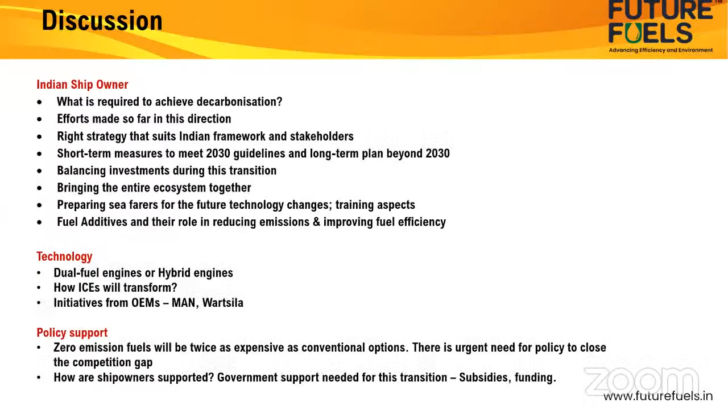The Institute of Marine Engineers, IMEI - all these associations instantly came forward to support this initiative.

Suggesting topics and speakers, I am very thankful to Captain Mahesh Yadav, who has been coordinating a lot of these speakers. Captain Bhasin and Anil Devli, CEO of INSA, also extended a lot of support.

In suggesting what we should be talking about in this webinar. And finally, Mr. Indranath Bose, when he came back from the US, within the short time available, he also connected with all the speakers.

And then collectively, we put together a lot of these topics which you see on the screen - what an Indian ship owner should be doing when at the crossroads of a lot of options and challenges, how technology will change, what kind of policy support we require from government, what is the quality of marine fuel that would be coming up, and are there any interim strategies before we reach the net zero goals, any shortcut methods that we can adopt. So a host of issues are there.

I'm not getting into the details because we have a wonderful set of panelists and two sessions which are awaiting to share their insights on this webinar.

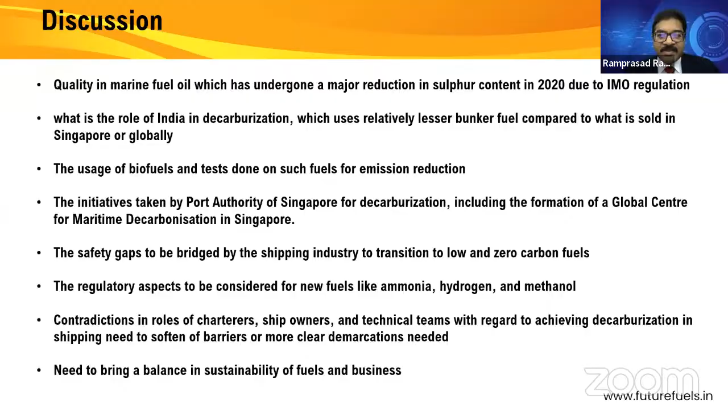Then let me quickly - so today these are the set of panelists that we have with us. I am not getting into the reading of the profiles because they are experts in their own domain and well known to the industry, and these profiles are available on our website, so you can get into the details later.

We have Mr. Indranath Bose, who is the advisor to the Great Eastern Shipping Company, with 50 years of experience in the maritime industry. Then we have Mr. Vijay Arora, who is the Managing Director of Indian Register of Shipping, IRClass.

Then we have Captain Mahendra Bhasin, who is the Chairman of BASA, and also the Managing Director of MSC Crewing Services Private Limited.

Then we have Jitendra Nimagadda, who is the CEO of Mudra Group. He heads the maritime related businesses of the group.

Then we have Sachin Kulkarni, who is a mechanical engineer from the Indian Institute of Materials Management. He is the head of marine business for South Asia from Wartsila.

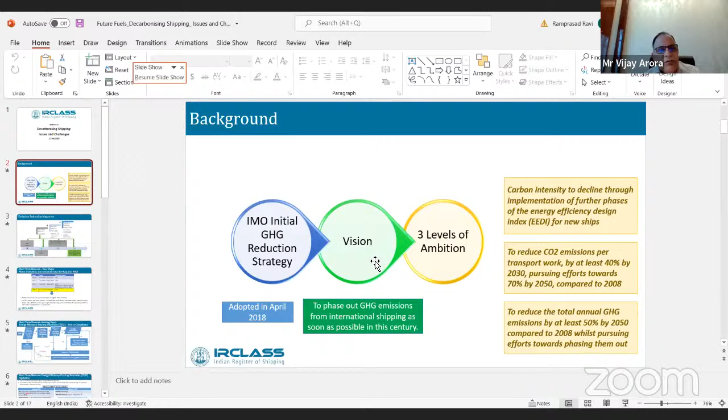Anything starts with a strategy, and if you look at IMO, it has been working on how the various emissions in the atmosphere have been controlled over a period of time. We talk about NOx emissions, Tier 1, Tier 2 requirements came, then sulfur desulfurization, and later it came out with the IMO strategy on decarbonization, saying how we can further improve GHG emissions. This IMO strategy was adopted in April 2018.

The vision was to phase out GHG emissions from international shipping as soon as possible in this century. To achieve this, a combination of factors was taken into account: carbon intensity should improve by improving the EEDI, we should reduce CO2 emissions by 40% by 2030 and 70% by 2050, and reduce GHG emissions by 2050, all compared to 2008 levels. So the framework was put in place. Can you go to the next slide?

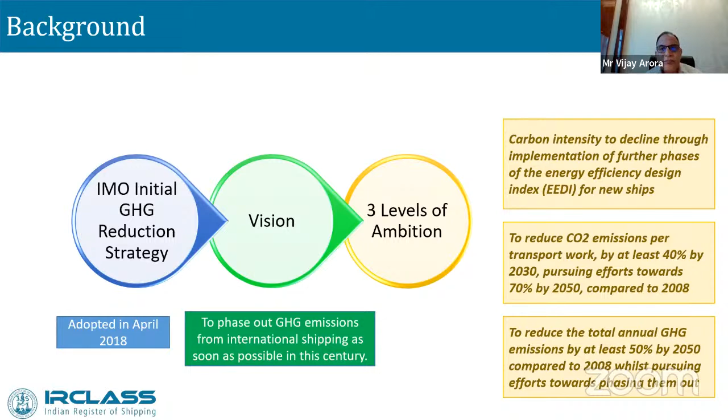So to achieve the vision, there were short-term, mid-term, and long-term measures adopted. Short-term measures were from 2018 to 2023, mid-term from 2023 to 2030, and 2030 onwards will be long-term measures. We are currently in the short-term measures.

When we look at those measures, if you recall, in 2018 we came out with SEEMP Part 2, which talked about how the fuel consumption should be collected. In 2019, we started collecting the fuel consumption. Then in 2020, we talked about how the new ships' EEDI phase can be advanced, and that is how the new ships are helping us reduce CO2 emissions.

At the same time, we are coming out in 2023 where CII and SEEMP Part 3 are coming out, where CII will be using the IMO fuel consumption data available with us, and the carbon intensity indicator will be used to see how both existing ships and new ships combined together are able to help us achieve the 40% reduction of CO2 emissions by 2030. So we go to the next slide.

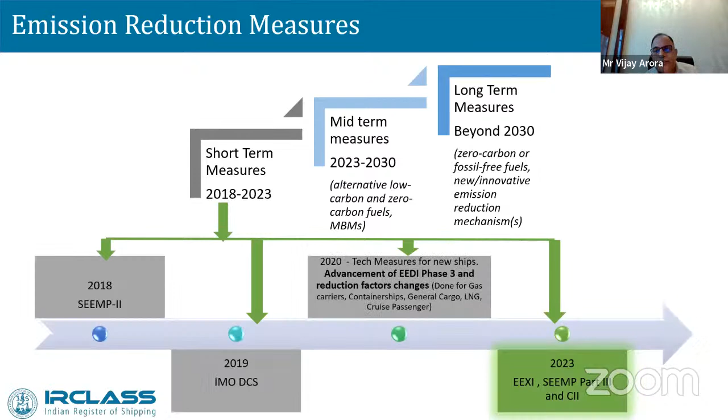This is talking about the various phases of reductions which were applicable for EEDI, mostly from the new ships. The efforts started from 2013 and are ongoing on the direction of how we can reduce CO2 emissions by designing ships in a manner that fuel consumption is reduced.

As stated in the IMO strategy in 2018, phase 3 has now been advanced so that certain ship types of larger tonnage will be requested to build ships in a manner that CO2 emissions are reduced. This advance from phase 3 will take place from April 2022, where such ships, maybe gas carriers or container ships, will be advised to have further reduction factors of 30% applicable.

Go to the next slide, sir.

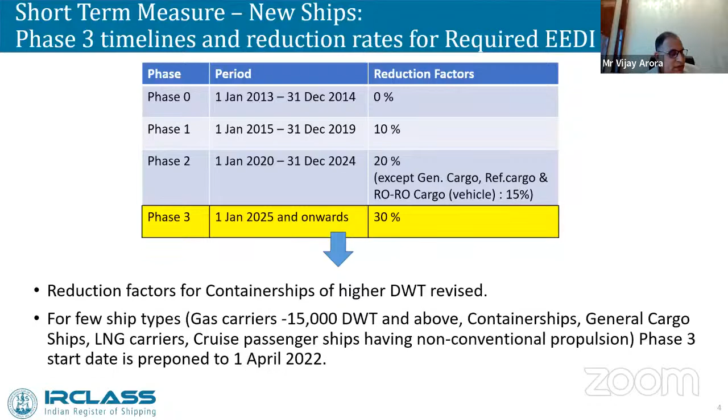As just stated, the combination of new ships and existing ships will continue for some time while we are using fossil fuels, and new ships are being designed with higher reduction factors. Even the existing ships need to catch up with the new ships. For that matter, IMO came out with a regulation stating that ships of 400 GT and above, and certain ship types mentioned in regulation 25, if their threshold value is greater than a certain deadweight, are subjected to this regulation.

That is how the attained EEXI will be calculated. The required EEXI will be calculated, and we'll compare that attained EEXI should be less than the required EEXI so that ships are issued the technical file and the International Energy Efficiency Certificate. This will be mandatory from the initial, annual, intermediate, or renewal survey falling due after 1st January 2023. But the regulation will become effective from 1st November 2022.

I would like to reinforce this issue of 1st November 2022. I think that date is a very important date. By this date, the ship owner should ensure that the technical file, if possible, is placed on board, so that if the PSC boards the vessel, you have a technical file available with you. Then the IEEC can be issued when the surveyor boards for whatever first survey falls due after 1st January 2023. We can go to the next slide.

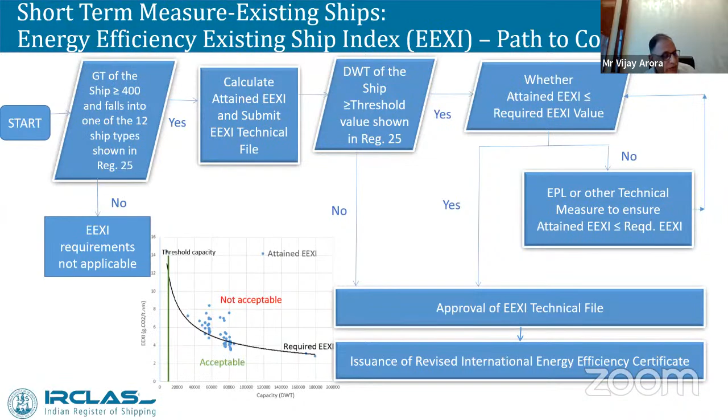Okay, sir, I may take 3-4 more minutes if you don't mind. Otherwise I'll be faster, no problem, I'll be a little faster.

That means today's existing ships have to match with the EEDI of those ships which are built with the phase 2 requirements, which is a very difficult task, but the owners have to do that. A little more difficult task is that if the ships are built before 2013 and they don't have the sea trial report, then there are some issues.

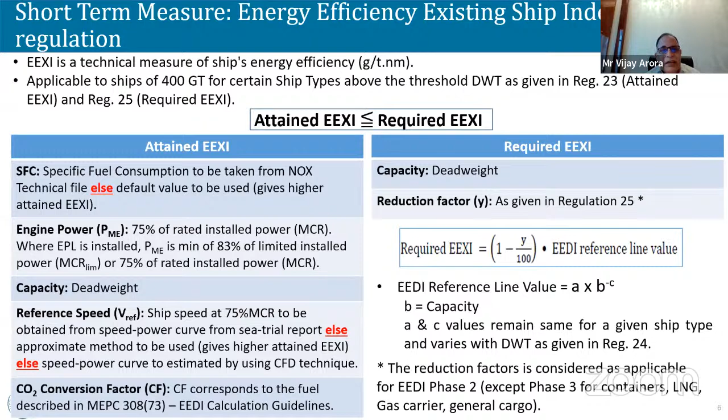But those issues can be resolved: either you can opt for the option that an approximate value can be used, or you can go for CFD analysis. The approximate value helps you, but it is not so encouraging for the ship owner because the attained EEXI goes on the higher side, by which the ship owner is affected. But if CFD techniques can be used to really determine the V reference, which is not available, then the ship owner is at peace. At least he is not affected.

We go to the next slide.

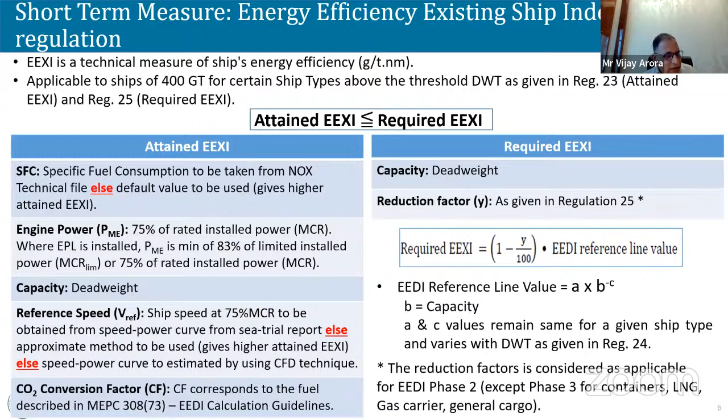Here again, I'd like to say a few things which are important. Let us be very clear that if we are able to meet EEXI today, it is good, but you have to meet CII also for all the time you are going to operate these ships. So it is always better to improve your attained EEXI to a larger extent so that the design itself takes care of your operational efficiency, because the ships are old; they cannot operate more efficiently than they are operating today.

You can control to some extent, but if you can have such energy saving devices fitted on your ships, you will be able to run these ships for a longer period, because this design efficiency will give you a factor in the CII part. We can go to the next slide.

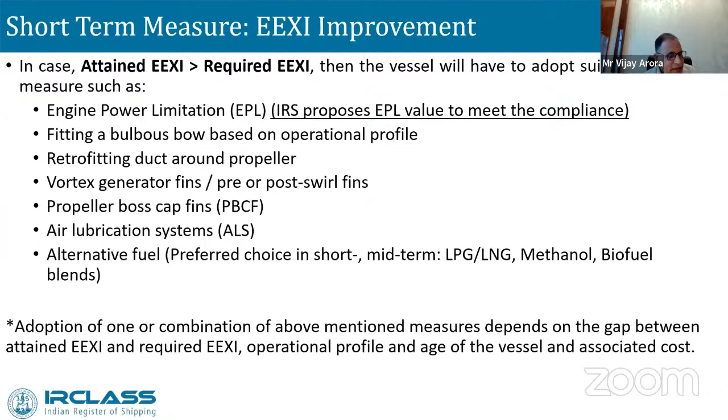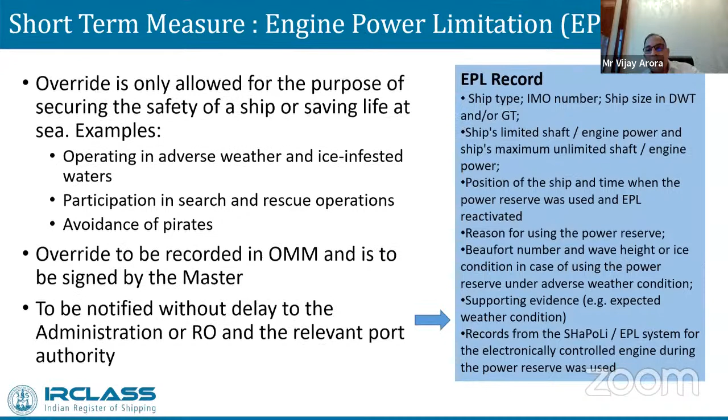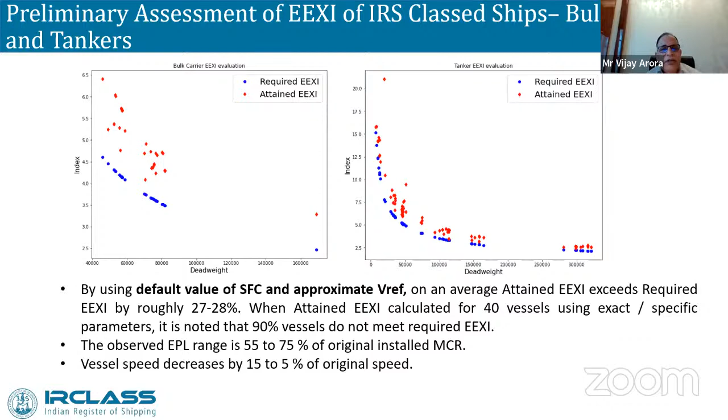So most of the vessels today, almost 90% of the vessels which are with us, have a problem that they will not be able to meet it unless they adopt some measures. And the measures required may range from 55 to 75%, which may lead to a reduction of speed from 15 to 5%. So we can go to the next slide.

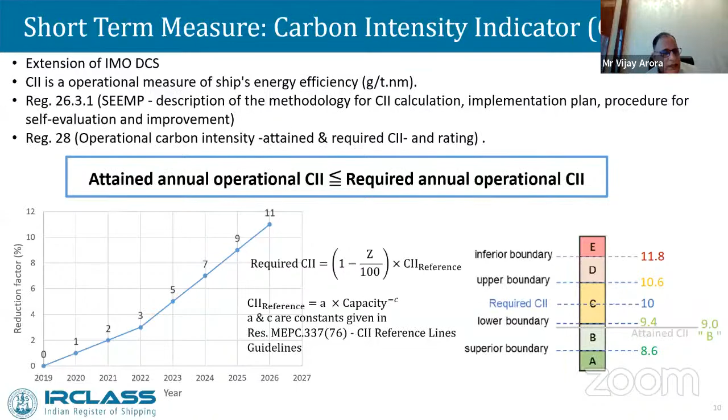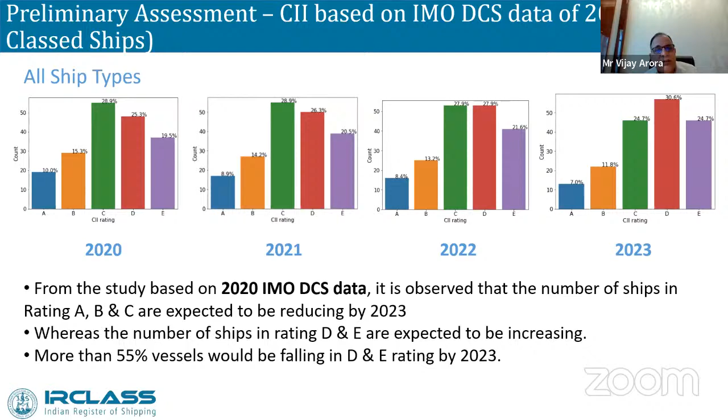So what is happening if nothing is being done? These ships which are in A, B, and C start going to D and E, which the IMO discourages, since they don't want a ship to have a continuous rating in D category for more than 2 times or in E category. And that becomes an issue which needs to be addressed by using the energy saving devices. We can go to the next slide, sir.

Again, the alternate fuels part I have not discussed in detail, but I'll say that the industry is working on this, but it requires a good approach by a range of industry people, governments, lending institutions, engine manufacturers, yards. They need to come together to look into the advantages and disadvantages of the various fuels which can be used, because it is not very clear. Though we know the properties, the infrastructure needs to develop, the storage capacities need to build up. So all these things will lead to the understanding as to which fuel will be useful to us.

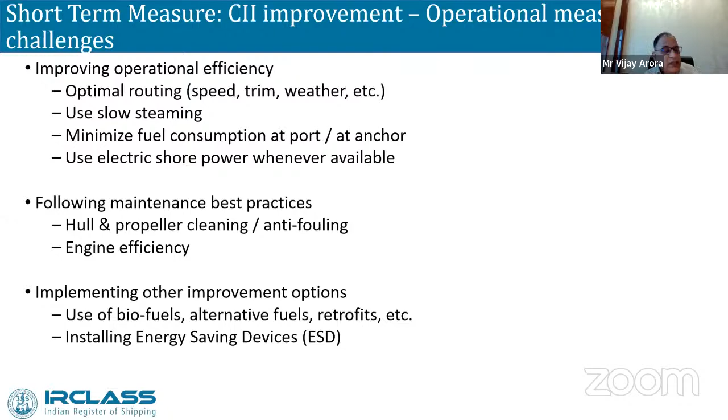While we know that the fuel which is seen to be viable is LNG, we have been using this fuel for a good amount of time. We are familiar with it, and we see that LNG can be a fuel which can be used for the next 5 years if we want to see how best our CO2 emissions reduction or decarbonization can take place. So we can put the next slides.

As far as IRS is concerned, sir, we have made rules for these types of ships. Gas fuelled vessels, LNG, LPG are available with us. We have made natural gas fuel rules for coastal vessels and inland vessels also. We have made guidelines on methanol fuelled vessels, fuel cell power installations, high voltage shore connection systems for ships, and battery powered vessels. Why these guidelines? We have put them into guidelines and not into rules so that, as more and more experience is gained, we'll see how best to incorporate them in rules. We can go to the next slide, sir.

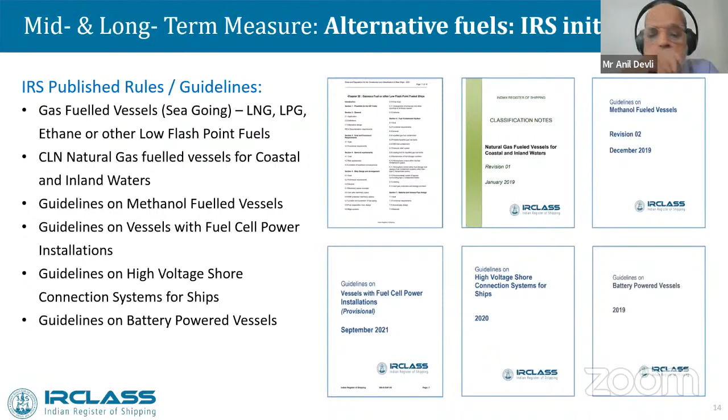So this talks about what we have done till now, again with the use of the industry. We are thankful to the industry to help us do something on this action. We have been able to run 2 cement carriers using the B20 biofuel, wherein we attained a reduction of CO2 by almost 7%, and there was no impact on NOx or SOx. That is also a good point.

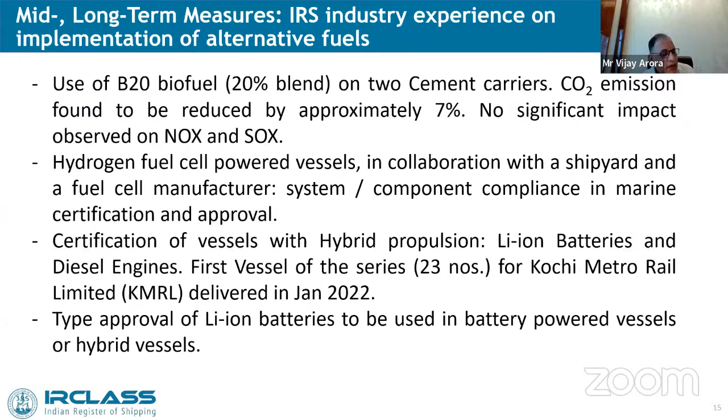We are working with the yard and the fuel cell manufacturer to have hydrogen fuel cell vessels ready maybe by this year, and we should be able to have such a ship operating. And we have also operated one first vessel, which is on this Cochin KMRL, which is Kochi Metro Rail Limited, where hybrid propulsion has been used, and we have successfully utilized the lithium-ion battery for operation of such a vessel. And we are working on the approval of these lithium-ion batteries once they are going to be manufactured in our country.

So the last slide talks about what IRS can do for the industry. We have prepared a web-based electronic tool which can help us to do the EEXI calculation. It is simple. You feed the data, it is available. And if the attained EEXI is less than the required EEXI, the technical file is prepared and can be submitted straight away to IRS for approval. And we can undertake these EEXI assessments, issue you the IEE certificate. We can help you with what energy saving devices can be fitted by using our CFD analysis. We have also prepared the CII tool, which can be used for measurement of CII ratings.

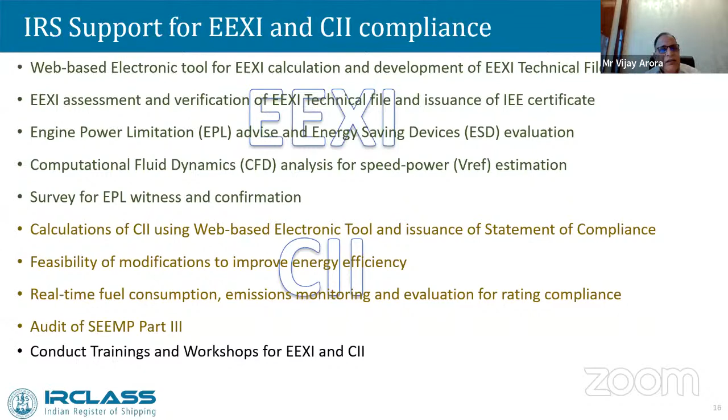And at last, we can conduct various trainings and workshops like this to see how best we can help the industry. We are geared up to see how best in the initial phase of short-term measures we can help the industry. And we are always open to any desire the industry may have and obtain from us, sir.

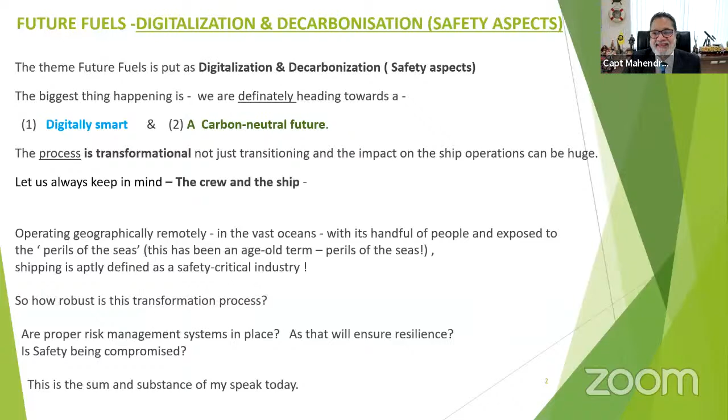Now, what is digitalization doing? It is catalyzing a wider use of data, data-driven models. I repeat, data-driven models and remote services in shipping, leading to improvements in efficiency and productivity. You will also notice I have put the heading, instead of future fuels or decarbonization, I've said digitalization and decarbonization, because they go hand in hand.

At the same time, the industry is also trying to find pathways towards decarbonization. In many cases, it is digitalization that is enabling innovation in decarbonization as well. Innovative technology is central, sure, but insufficient in isolation. Why did I say that? The success of these transformations depends on people who are the sharp end of business, the seafarers who perform and who deliver.

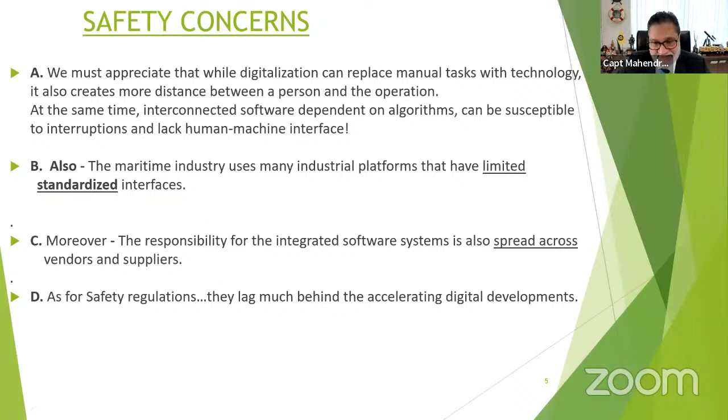Solutions. What should be done? Verification methods of future systems should be based on a systemic perspective on safety that consists of people, organization, and technology that are all related to each other and their environment. As a matter of fact, close collaboration throughout the entire life cycle will greatly facilitate system integration. Safety assessment should generate evidence for safety.

Simulation, I have put it in bold, can play a major role. Simulation can help to test and verify safety levels of the system without creating a risk to life. Another way to conduct this verification is by using digital twins that include dynamic updates on conditions and operational parameters.

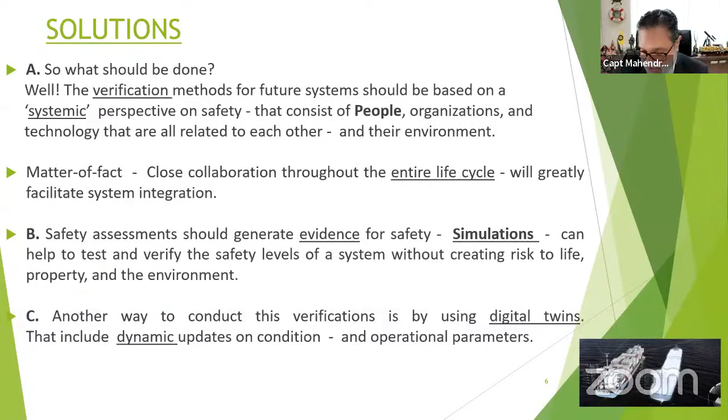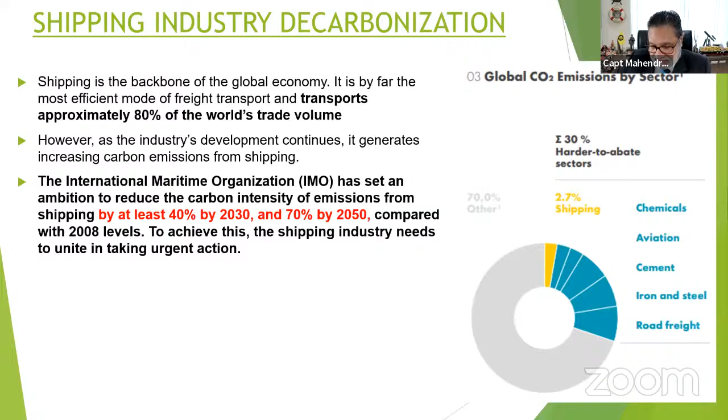Now I'm coming back to the subject. I was very glad Mr. Bose and Mr. Arora spoke about most of the things, so I'm not going to dwell much on the other one or two slides. Only thing, keep in mind that, at least, 40% by 2030 and 70% by 2050, the IMO has set this ambitious target. To achieve this, the shipping industry needs to unite in taking urgent action. I'm going to skip this slide, already shown by Mr. Arora, sir.

Sir, there is growing pressure to reduce carbon emissions. The industry also started forming coalitions, launching pilot projects. But where are we going? What have we achieved? Do we have enough data?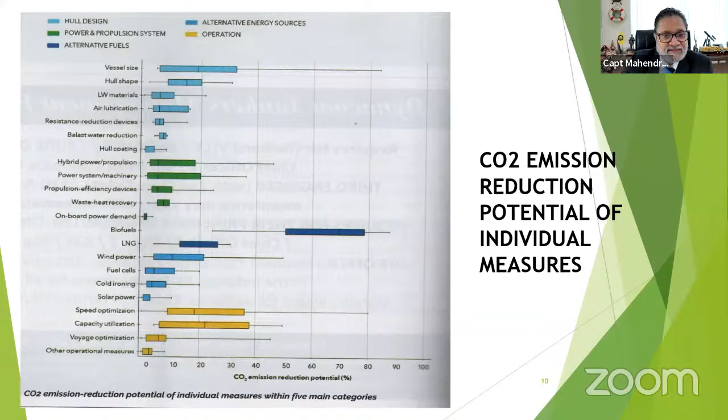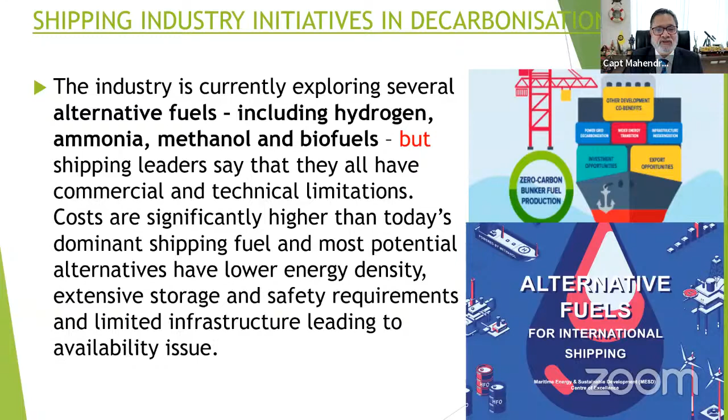While the industry is exploring several alternative fuels, okay, there are 2 minutes more, alternative fuels including hydrogen and ammonia, shipping leaders say they have commercial and technical limitations. Mr. Arora spoke about EEXI, a very important date, sir, 1st November 2022. Owners, administrations, and industry need to be ready for that.

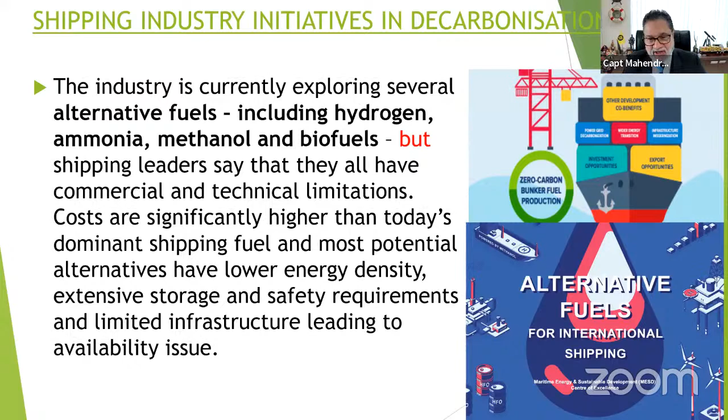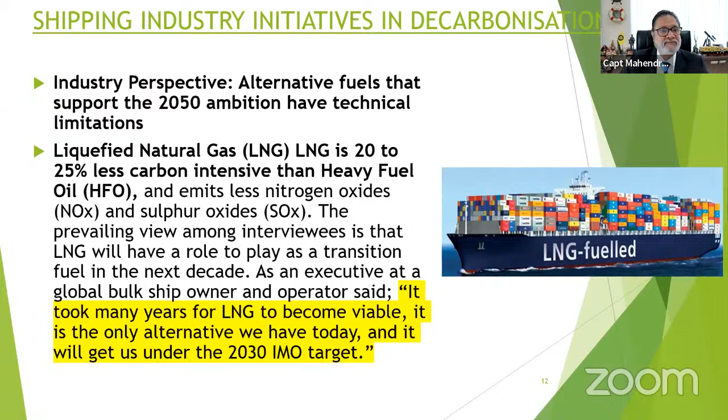Something on the current situation. LNG. LNG is 20 or 25% less carbon intensive. I will read the area highlighted in yellow. It took many years for LNG to become viable. It is the only alternative we have today, and it will get us under the 2030 IMO target. What happens after that? That's what we are all discussing. Other alternative fuels, hydrogen and ammonia, biofuels, methanol: ongoing research and development will tell us about the future fuels.

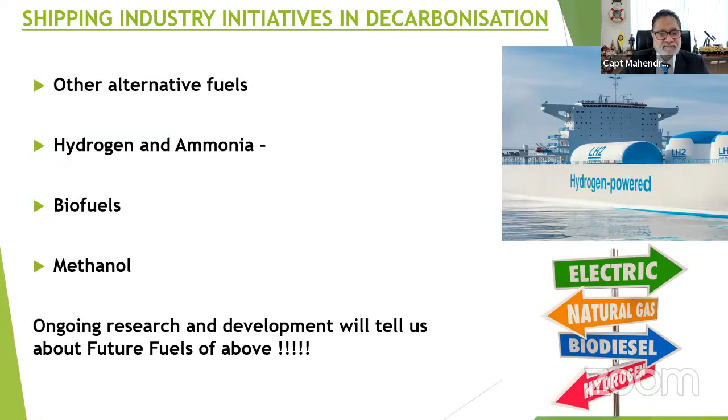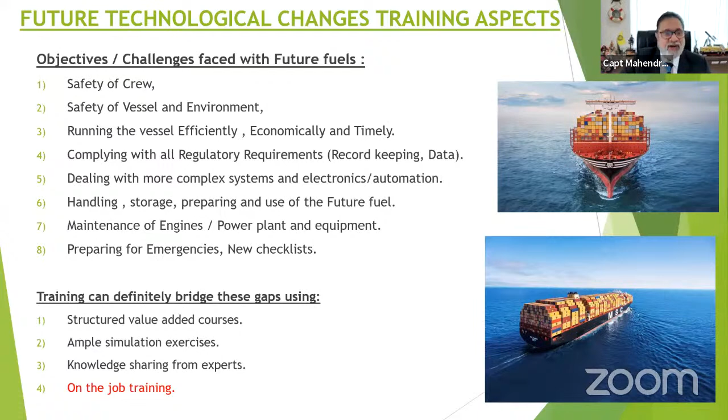You are all aware for LNG, there is a requirement for the people going on board must have 1 month sailing and 1 bunker operation. So these are good things, on the job training. In conclusion, sir, digital transformation calls for system integration and the new ways of managing risk associated with complex systems. Transformation to carbon neutral shipping requires stakeholders collaborate to increase transparency and create a culture of continuous learning.

Most important, both these advancements should be complemented with efforts to keep people in loop, so that the innovative technology that is designed, maintained, and operated by optimally performing people in organizations that embrace holistic risk management is what will put the industry in the best position to transform itself through the digitalization and decarbonization.

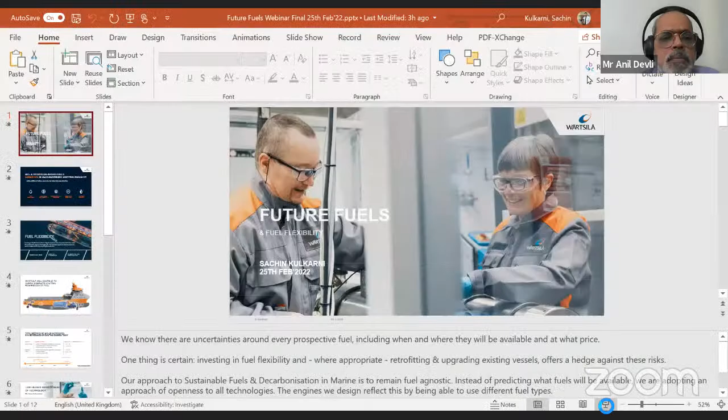A lot of wise and advisory words have already come. What I'll try to do is next 5 to 7 minutes, just touch base on the future fuel parts and the fuel flexibility part of it, and how Wärtsilä can support the ship owners and the shipping industry in large.

So we have seen that IMO targets for 2030, and then it's very clear that compliance can be achieved in the short term by optimizing the vessel operations and basically introducing the slow speed, which we call engine power limitation. However, when we look at the IMO 2050 greenhouse gas targets and beyond, then we need to consider the introduction and the transition to the green fuel. Now, the challenge here is that there are many different options, and at this point of time, no consensus on which future fuel will be commercially available.

So commercial availability depends on various factors, that is geographical location, the national interest of the particular country, legislation, and the availability of the feedstock. Now, these uncertainties create a business risk regarding the fuel availability. So there are certain factors which ship owners must be considering while taking the decision forward. The increased capex and opex associated with this, the vessel design, structure, storage, and the handling, including the complex setting in managing the cryogenic condition of the fuels and the toxicity.

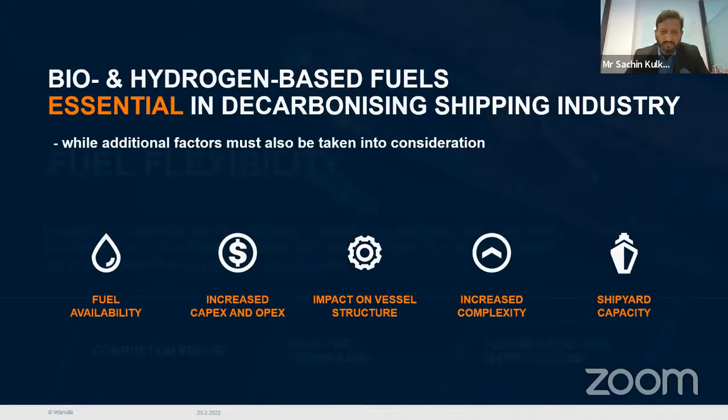Then we also have the timing issue. When should one make the investment and go for another fuel? We have limited amount of shipyards, and at any point of time, it will be not feasible to upgrade all these vessels or build new vessels at the same time. So these are the factors one has to consider before taking the decision. So then what is the solution forward?

We believe that investing in flexible fuel solution mitigates the business risk associated with the future fuel. The combustion engine is fuel agnostic. The business impact of future conversion can be reduced further by preparing the fuel tanks. So what we are talking about here is that with the combustion engine, it's important to understand that the engine doesn't really care whether we feed it LNG or ammonia.

It's also important to remember when building a new ship, the fuel supply system is to be factored. This is perhaps the toughest thing to change during the retrofit project. And while building a new vessel, one needs to think about the storage part of it. These kind of tanks installed today need to be suitable to the transition and to use the green fuel in the future.

So in Wärtsilä, we shall continue to support and supply the complete system regardless of the fuel. We are ideally positioned at this point of time to provide the complete integration solution, the complete fuel propulsion package from the tanks, the fuel supply system, the engines and propulsion.

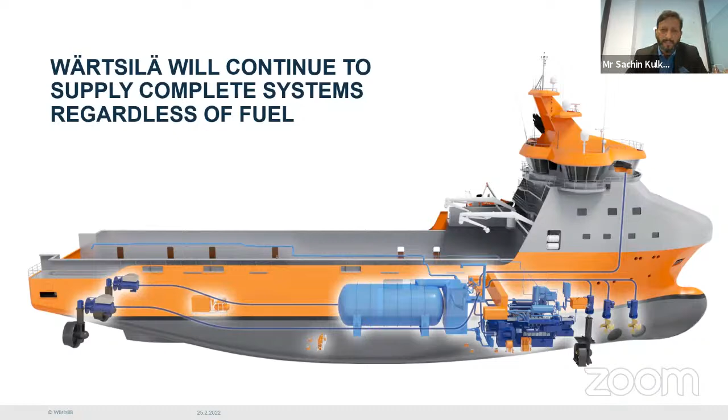So if a ship owner has a diesel engine today, what can be done at this point of time before we have green fuels available? When we look at the diesel engine, there is a potential for upgrade. We can look at improvement in efficiency via different upgrades. We can also look at conversion of the engine to DF or LNG engine, and it can derive a certain amount of reduction potential, as we can see over there.

Then if we have a multi-fuel engine, it's already an advantage position. We look at improvement in efficiency via different upgrades again, and we also can look at reduced methane slip. So when we look at the milestone till 2030, there are various ways.

If we look at EEXI plus optimization of vessel operation plus LNG as a fuel, this could be the recommendation. And then moving forward to 2040, once green fuels are available, we can look at carbon neutral fuels.

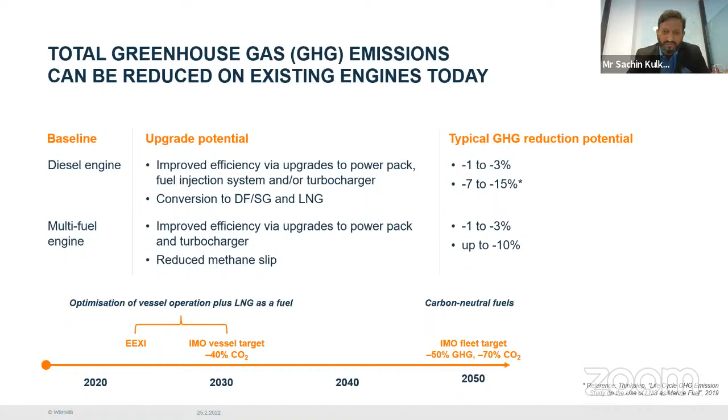So the continuous development of technology in Wärtsilä, our future fuel roadmap is very clear. When we look at biosynthetic methane, it contains 99% methane, and it can readily be used in liquid form with equivalent equipment made for LNG.

Then we have methanol. Its conversion package is available already for one of our engines, Series Z40, and I'm pleased to share that we already have another engine, Wärtsilä 32, now compliant with methanol usage. We have the technology, and now we are looking at industrializing this technology on different portfolios of Wärtsilä engines as per market needs.

When you look at ammonia, again we have a technology capable of using ammonia. At this point of time, we need a combustion concept to maximize engine performance, and safety aspects are currently being investigated. For hydrogen, our gas engines are already able to blend hydrogen with LNG up to 25%, and we are currently working on defining the technology for pure hydrogen, focusing on maximizing engine performance.

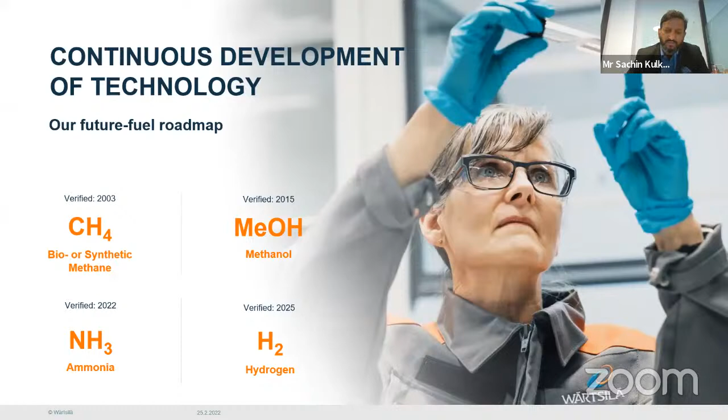So while this is happening, all research and development is in process. How do ship owners look at the situation currently? The transition fuel is something necessary to cope up, since we don't have green fuel available yet. So customers, ship owners, need to act now if they want to reduce the greenhouse gas emissions of their vessel fleet.

Conversion to LNG is one of the best options available because the multi-fuel engine opens up more options to reduce GHG emissions further in future, by allowing a transition to biosynthetic methane, green ammonia, or methanol when they are available.

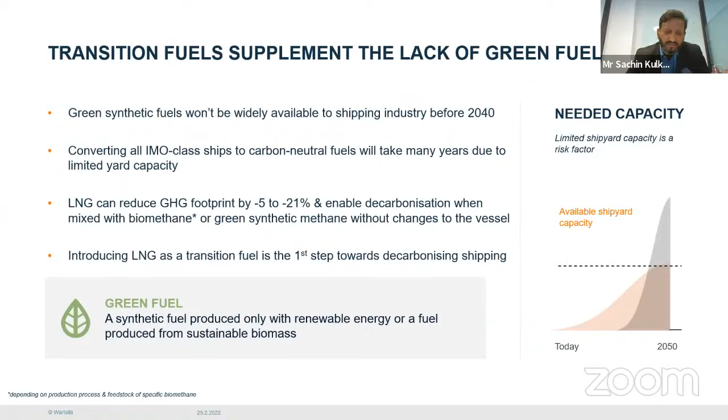When we look at different fuels, due to the low volumetric density of the different fuels, the vessel endurance could be different. That needs to be considered. The tank size and location is another important operational aspect to be considered.

Blending versus pure — what are the output requirements? What are the efficiency requirements, emissions, and along with these green fuels, what exhaust gas abatement is to be done?

What systems need to be changed when introducing a new fuel? From our side, we can look at the fuel gas supply system — that's a very important part of the system. There we need to look at materials, and we need to look at the different pressures, insulation, and toxicities associated.

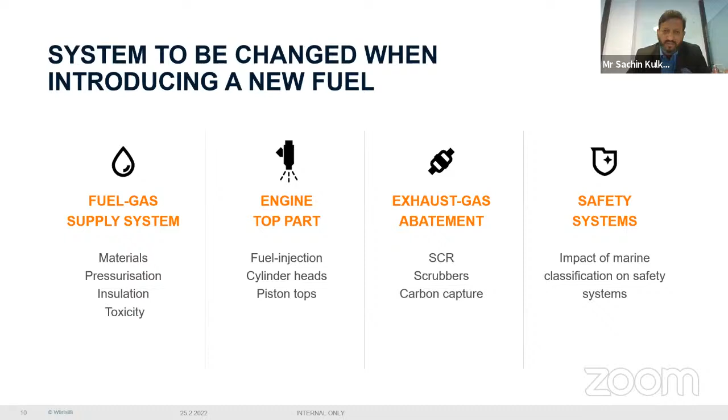A small modification — we talk about the engine top part: fuel injection system, cylinder heads and piston tops, exhaust gas abatement like SCR, scrubbers and carbon capture, depending on the particular fuel being looked at. And of course, importantly, safety systems and the impact of marine classification on safety systems. So these are the few changes associated with introducing a new fuel.

So as a summary, what are the key takeaways? There is no single future fuel — there will be a whole variety in use. Investing in fuel flexibility will mitigate compliance and business risk. Wärtsilä will continue to supply a complete system regardless of fuel, and the multi-fuel engine offers a viable upgrade path to future fuels. With this, I would like to conclude my opening remarks.

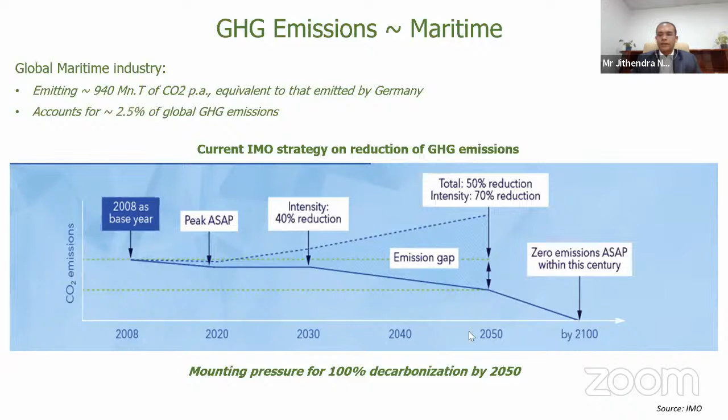We are also seeing a lot of initiatives being taken by the industry. So what are the kind of future fuels currently on the radar in terms of meeting these decarbonization targets? We are talking about LNG as an immediate intermediate fuel for reducing CO2 emissions, and there have been a lot of vessels already plying commercially with bunkering happening. We are talking about other fuels like methanol, hydrogen, ammonia coming into the picture. Biofuel is also one of the other future fuel options.

So whether anything has been finalized, whether something has been taken up by the industry as a standard, well, it depends on several factors: the kind of technology on board and onshore, the energy density that each of these fuels delivers, the safety requirements of the vessel, the onshore, and the crew, the scalability of the technology and the availability of the fuel across the globe, the ease of transportation from place to place, and of course, the financial viability.

These are the major factors which will determine which of these fuels, or a combination of fuels, will become the options for the future fuels. However, the jury is still out. This is still some time away, at least in my mind about 5 to 10 years, before a fuel or combination of fuels gets finalized and the industry moves towards standardization.

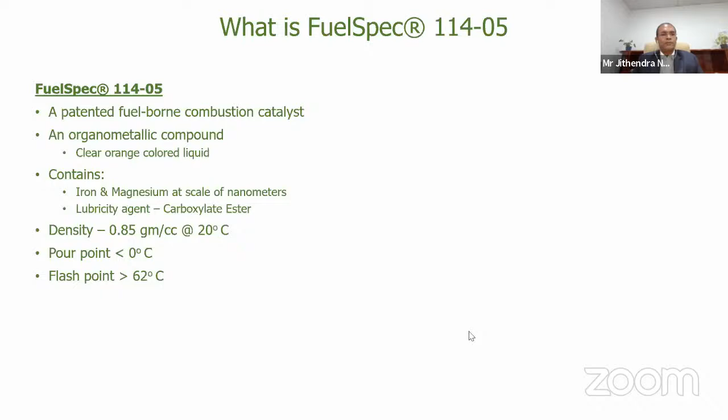So what does it contain? It contains basically iron and magnesium at a scale of nanometers, less than 10 nanometers. And the medium, that is the lubricity agent, is a carboxylate ester. A few more points in terms of its pour point, flash point, and density of the product.

So what is its functionality, or what does it do to help in reducing these kinds of emissions? It basically improves the thermodynamic efficiency of the combustion of hydrocarbons through a catalytic process. It's a patented and proprietary technology based on electromagnetic emission spectra complementarity.

So what does it do? It actually leads to complete combustion of fuel. Normally in any kind of combustion engine, you'll always have a certain amount of hydrocarbons coming out as unburnt hydrocarbons, so the combustion is not 100%. That leads to excess emissions, whether it's soot or particulate matter, UHCs, NOx, CO, etc.

Because of this complete combustion by the FuelSpec, there is a reduction in NOx, what we've observed from empirical results as well as field trials, by up to 10 to 30%. Similarly, emission reduction in CO by up to 40%, and particulate matter reduction up to 90%. There is also a reduction in UHCs, and it leads to lower carbon deposits in the equipment.

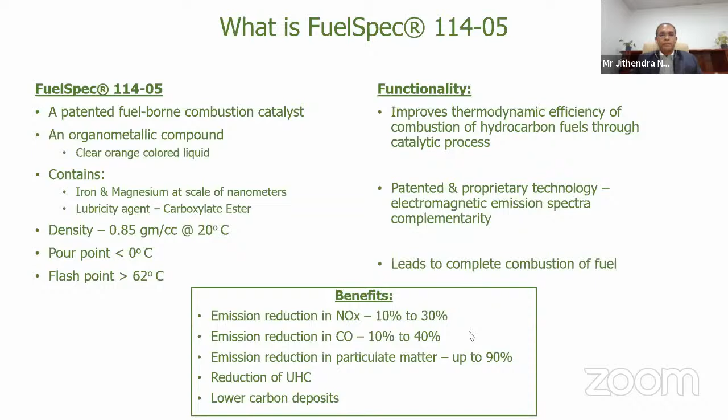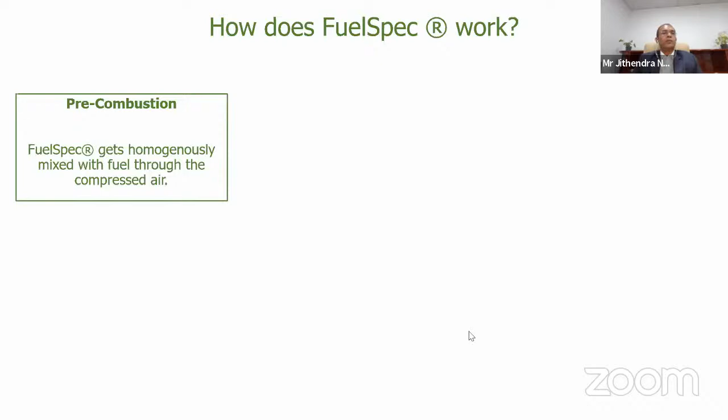So how does FuelSpec work? Fuel spec actually has very high miscibility, that is, it gets very easily mixed with the fuel. In the pre-combustion process, the FuelSpec gets completely and homogeneously mixed with the fuel through the compressed air.

During the first phase of combustion, that is the actual combustion which happens for the hydrocarbons in the engine, normally the fuel gets burnt and a certain amount of energy gets wasted because the entire energy doesn't get transformed into 100% combustion. That is where the iron and magnesium components of FuelSpec actually store the energy, that is the peak heat, during the first phase of combustion, and release that heat in the second phase of combustion.

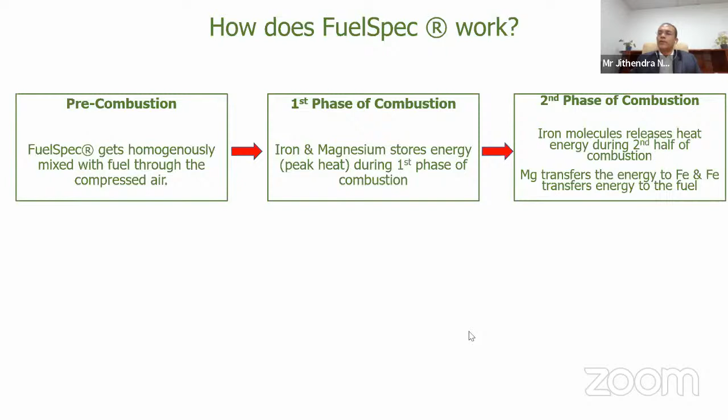So magnesium, as I mentioned about the electromagnetic complementarity, captures the energy, and iron also captures the energy. Iron initially releases that energy to the hydrocarbons, and the higher spectrum magnesium transfers that energy to iron, and then subsequently iron transfers it back into the fuel. This is what leads to complete combustion of the fuel.

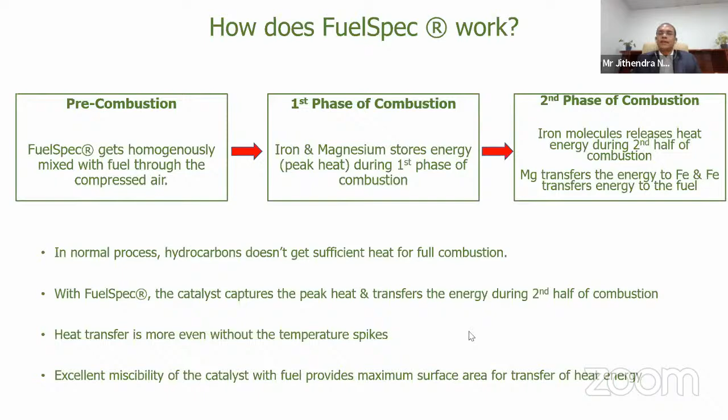That is the reason why, in a normal process, the hydrocarbons don't get sufficient heat for full combustion. With this catalyst, it captures that peak heat and simply transfers it to the fuel during the second half of combustion. Hence there are no temperature spikes and the heat transfer is more evenly distributed. And because of its excellent miscibility, the FuelSpec gets completely mixed and has a greater surface area for transfer of energy into the hydrocarbons.

So how is it used? Do we require any additional equipment or infrastructure, either on board the vessels or on shore? Absolutely nothing. It's just a very simple mixing ratio of 1:4,000. So for every 4,000 liters of fuel, 1 liter of this FuelSpec has to be added. You can see the pictorial representation of how simple it is, just a direct mixture based on this 1:4,000 ratio.

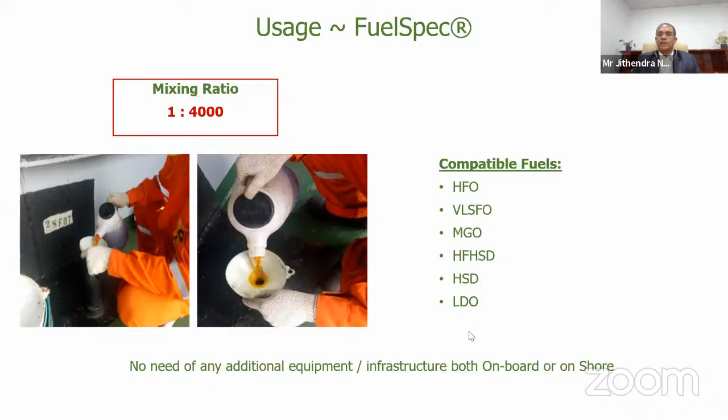So all types of fuel that go into vessels, heavy mining equipment, logistics industries, or fuel-fired boilers can be compatible fuels for usage of FuelSpec, whether you're talking about HFO, VLSFO, MGO, HFHSD, HSD, or LDO.

Of course, one of the first questions which comes to most of your minds, I'm sure, is: is it safe? What happens if we mix this particular catalyst into the fuel? Does it damage the engine? Does it create any kind of other side effects?

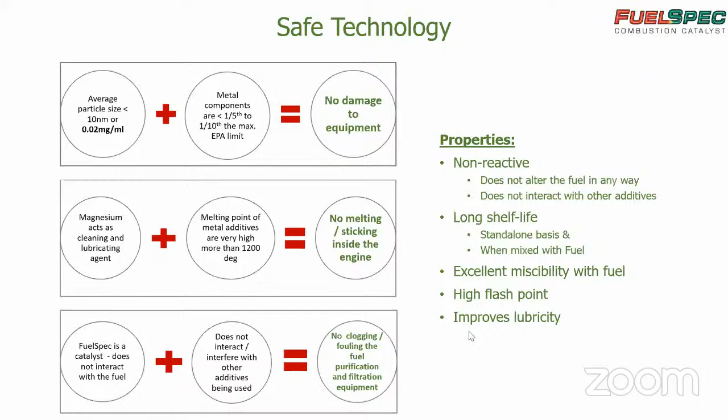Absolutely none. First and foremost, the average particle size of this ferrous and magnesium is less than 10 nanometers. In fact, it varies between 5 and 10 nanometers. So the metal components are less than 1/5 to 1/10 of the maximum EPA limit prescribed by the US Environmental Protection Agency. Hence, there is absolutely no damage to either the equipment or the environment.

Second, the magnesium in this fuel catalyst acts as a cleaning and lubricating agent. And the melting point of both these metal additives, ferrous and magnesium, is very high, more than 1200 degrees, so there is absolutely no question of melting or sticking inside the engine. And the FuelSpec is just a catalyst. It doesn't interact with, alter or modify the properties of either the fuel or any other additives being used complementarily in the engines.

Hence, there is absolutely no question of clogging or fouling the fuel purification systems, the piping systems, or any other pumping systems. As I mentioned, the FuelSpec is non-reactive, neither with the fuel nor with any other additives. It has a very long shelf life without any degradation of its quality, either on a standalone basis or when mixed with the fuel.

It has excellent miscibility, so mixing this FuelSpec with the various types of fuel we mentioned is extremely easy and doesn't require any additional knowledge, technical equipment or infrastructure. It has a very high flash point, so it is very easy to transport, and it also improves lubricity.

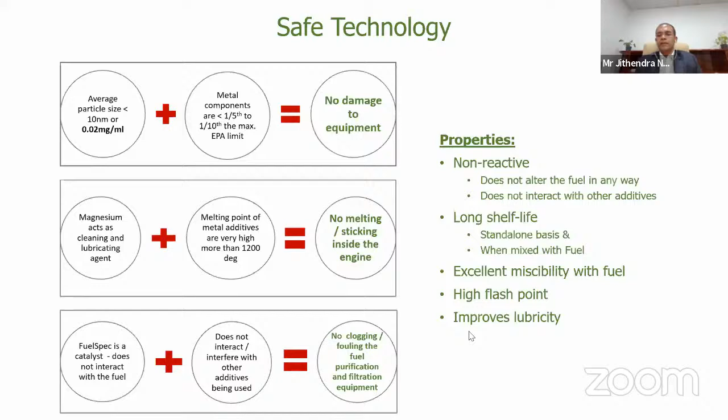What are the kind of approvals that this particular... If you can, I request you to kindly hasten, please. Thank you. Sure, in the next couple of minutes.

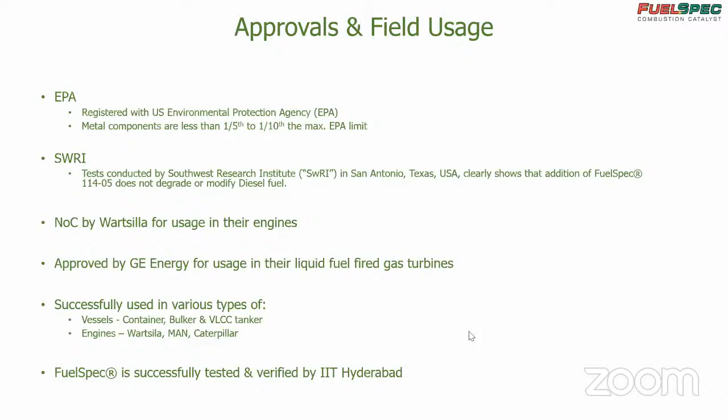So it has the approval of the US Environmental Protection Agency, and as I mentioned, it is less than 1/5 or 1/10 of the maximum EPA limit. The Southwest Research Institute of the US has tested this product mixed with fuel, and it shows that this catalyst doesn't degrade or even modify the fuel characteristics. The NOC has already been obtained by Wärtsilä for usage in their engines. I would also like to thank Mr. Sachin and the entire Wärtsilä team for that.

It is also approved by GE Energy for usage in their liquid fuel-fired gas turbines. And it has been successfully used in various types of vessels: bulkers, bulk containers, general cargo vessels, VLCC tankers, in both Wärtsilä and Caterpillar engines. And the FuelSpec has been successfully tested, and its properties and results have been verified by IIT Hyderabad.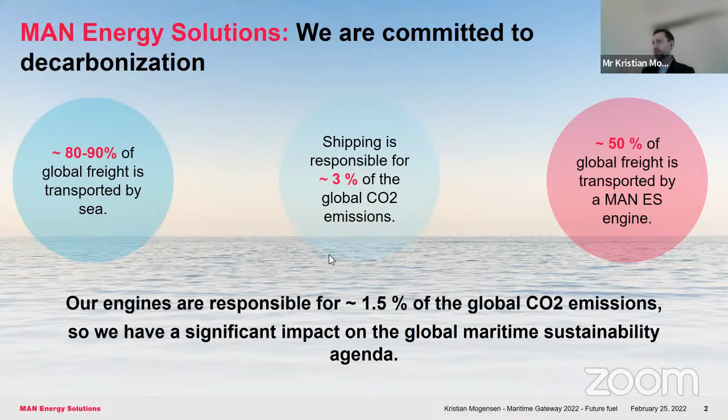So with this in mind, the journey towards a carbon-free future is very much on our mind, and this is a goal for us, to be able to provide solutions with less carbon emissions. And the journey towards a less carbon-intense industry has gone on for quite some time now. We had our first ME-GI, our first LNG engine, in service around 2011. And in 2012, approximately 1% of all the power ordered for vessels, for main engines, was with dual fuel engines.

And we saw not so much movement in this before 2017 and 2018, where we started to see an increase in dual fuel engines in the market and on order. In 2021, around 30% of all contracted gigawatts was with dual fuel engine technologies. And it is our expectation and prediction that the share will increase over time, in order to have a less carbon intensive engine. In January this year, actually 50% of all new building engines ordered were with dual fuel technology.

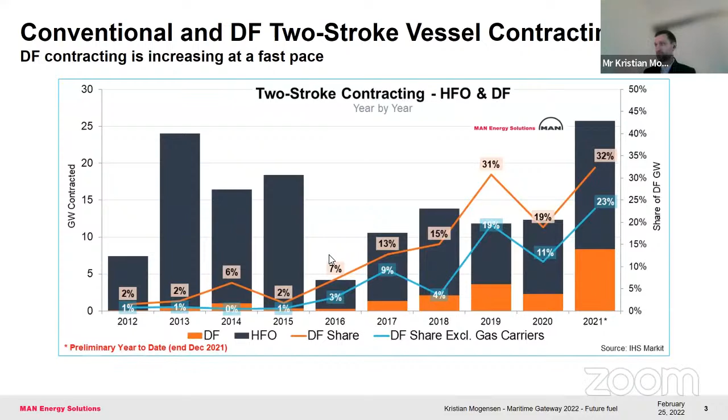To give us a small overview of what kind of solutions we are providing from MAN Energy Solutions: in 2011, as mentioned, we started with our ME-GI. In 2015, we started the development of the methanol engines, and the first methanol engines came into service around 2016.

And then the time span between issuing new technologies was reduced quite significantly. So also in 2016, our ethane engine came into service, and we started to develop our LGIP in 2018, and we had the first in service in 2018 as well. And now with the LNG carrier market, we saw the need for developing an Otto cycle low pressure LNG engine, where we now have 100 on order, but no engines in service yet.

And our latest development is the ammonia engine. We started the work in 2020, and we expect to have the first engine in service in 2024. In parallel to all of this, retrofit is something that we have done throughout the time, where we started with Nakilat in 2015, and then we have done quite a number of retrofits since then.

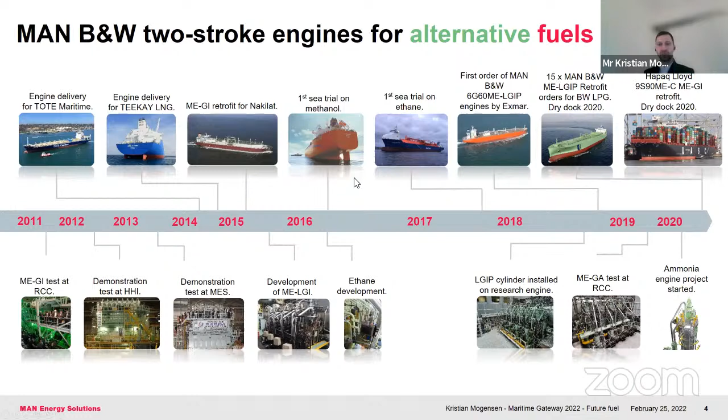So to have a more simple overview of the engines that we are providing, we have our LNG engines, which currently offer, let's say, a 20 to 25% CO2 reduction compared to conventional fuel, heavy fuel oil, that is. Then we have our ethane engine, which is a sister engine to our LNG engine, where we have gas injection to the combustion chamber.

And then we have our series of liquefied gas injection engines with the methanol engine, where we are now at the third generation of this engine, where the first was introduced in 2016, the LPG engine, and then our ammonia engine, which is still very much under development, but we have committed to have the first on order in 2024.

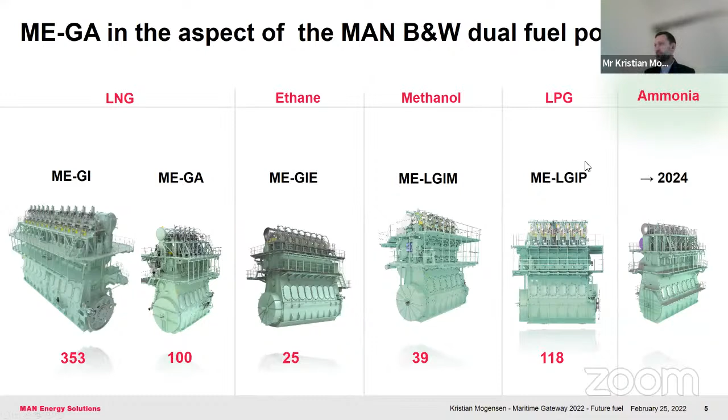So where to go and how do we see the future? Because as we just heard, we are currently moving into a very interesting period where decarbonization is a very hot topic, and also a fast track topic, so to say. We see a lot of regulations coming into force now, both from IMO, but also the EU just issued Fit for 55, which also has a great impact on how we can operate the engines moving forward, as well as owners that proactively would like to reduce the greenhouse impact beyond what is required by regulations.

And that is because the owners now start to see that there are customers for chartering the vessels, even though we are seeing a higher OPEX and a higher CAPEX because we are utilizing the new fuels, as well as finance institutes with the Poseidon Principles and others that are only interested in investing in, let's say, greener engines. We at MAN are a service provider, so we are listening to the market to see what it requires us to develop, and we are really trying to keep up with the demand out there, which sometimes can be difficult.

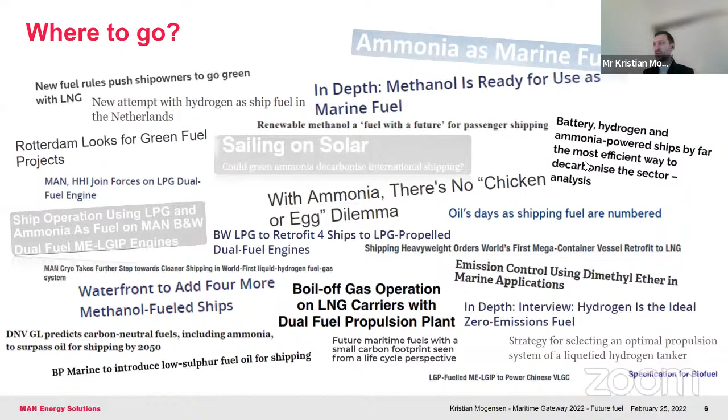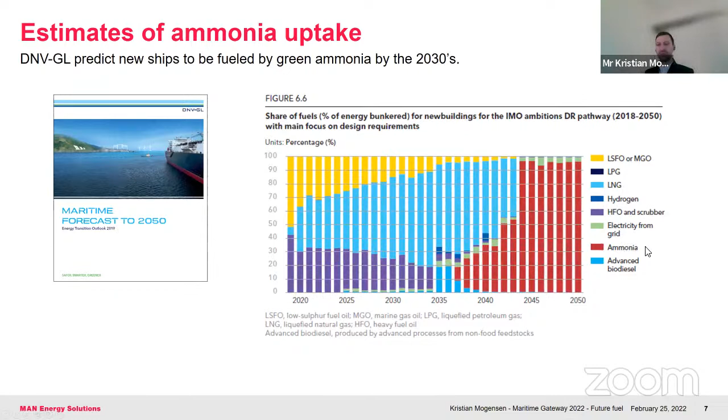And what comes first, of course, is all the inputs to what the future fuel is - there's still a lot of uncertainty. As of now, methanol is a very popular future fuel, so to say, but currently the infrastructure for bunkering methanol is very weak throughout the world.

So our approach is that we would like to be able to supply the main engine, and then at a later stage, it is possible to refit or retrofit to any given technology that we have in our portfolio.

Currently, when we look at the reference list of conversions that we have done, it includes conventional ME-C engine to GIE ethane engine, conventional ME-C engine to LNG GI, as well as a batch of 15 vessels from ME-C conventional engine to LGIP.

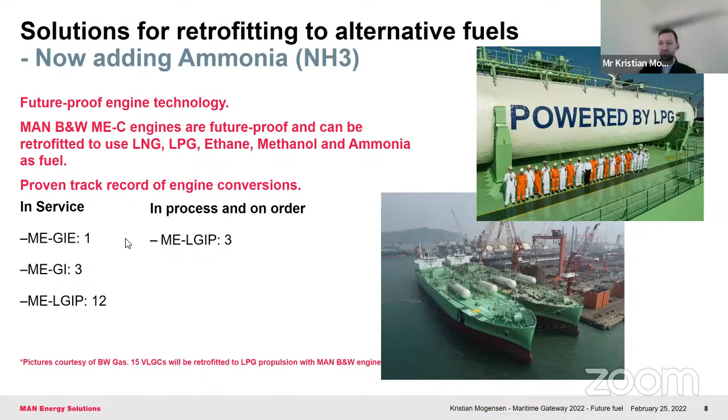Currently, we are also looking at methanol projects. We have some hot leads, as well as ammonia, which of course will also be possible to retrofit in the future. That was what I had for you today.

And the closing remark - we see a high demand from the end customers, and we see it as possible. We are, of course, keen to listen to the market, to hear what they are telling us and what the next engine technology should be. Thank you.

Thank you very much, Mr. Mogensen, excellent presentation. I mean, we need assurance from engine makers because you are at the heart of things apart from shipbuilders. So thank you very much. I'll come back with questions at a later stage.

So, Ms. Vinita Venkatesh, I understand you are in a very different time zone, is that right? Yeah, that's right. So I'm in a very cold and snowy Chicago, and it's 1:30 in the morning. Okay, I can imagine your situation there. Please excuse the lighting - the lighting in this hotel is not very good.

So if you will permit me, I will just quickly put up some slides in exactly the 5 minutes. Please go ahead, please, yes.

So I'm going to talk to you again about fuel spec, which Mr. Jitendra has already spoken about, but from a little different angle. I'm heading a company called Ocean to Door, which is part of the Mudra Group, and we have the responsibility of the global marketing and distribution of the fuel spec catalyst.

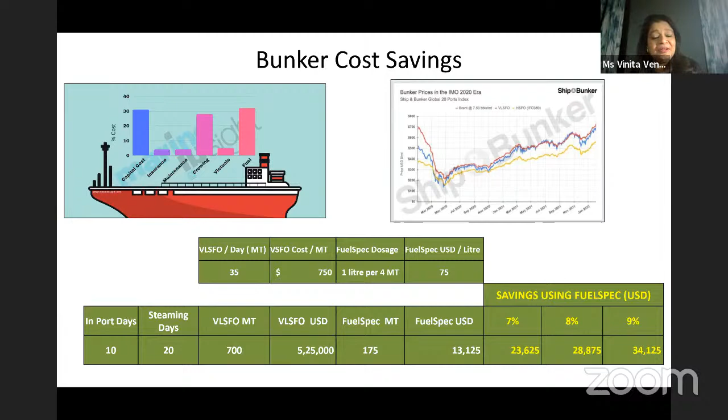And even if we don't get 7%, even if you get 5%, it's a massive saving.

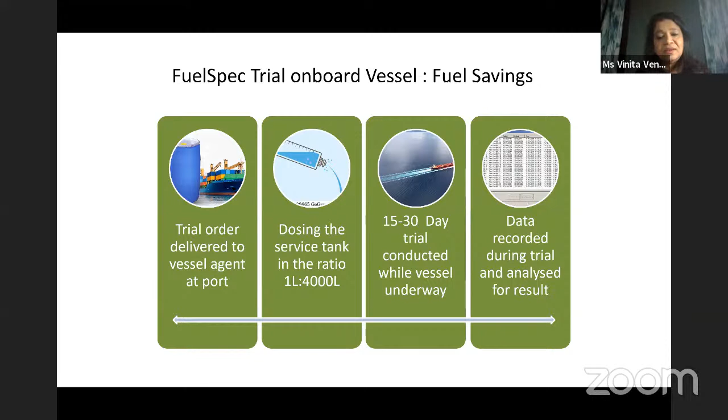So just to give you a quick look at how the trials are done, the dosing ratio is 1 to 4 tons. Depending on the appetite of the customer, the trial can be for 15 to 30 days, and then the data is recorded and analyzed. This is the trial that we did on Jal Kumud, a very simple dosing on board by the vessel crew, at least for the trial.

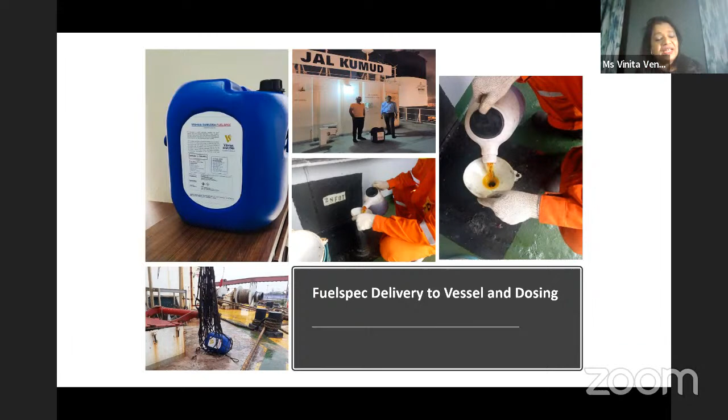Some questions that keep coming up from people are that we want to clarify FuelSpec is a catalyst, which makes for fuller combustion, and it's not an additive. It is not proposing to replace the working of any of the additives that the vessel's technical teams might be using right now, and it is also not going to interfere with the working of any additive.

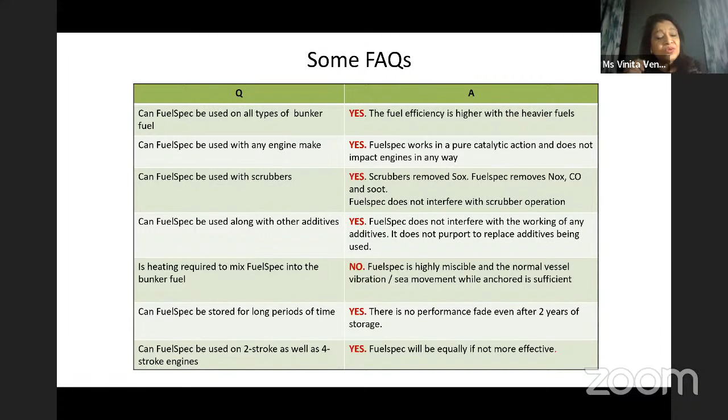It doesn't impact the engine because it's a pure catalyst with no deposits. It can work, of course, with scrubbers because scrubbers have a different purpose. It can be used on both 2-stroke and 4-stroke engines and stored for long periods of time.